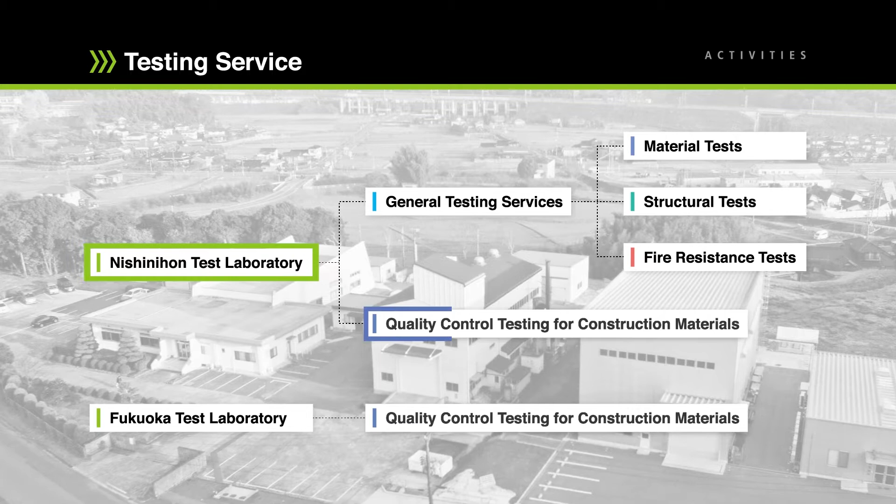The business outline at Nishinihon Test Laboratory covers the quality control tests for construction materials and civil engineering, the tests accompanying the performance evaluation, and the construction material tests related to concrete and steel used for building and civil engineering. The Fukuoka Test Laboratory covers only the construction material tests.

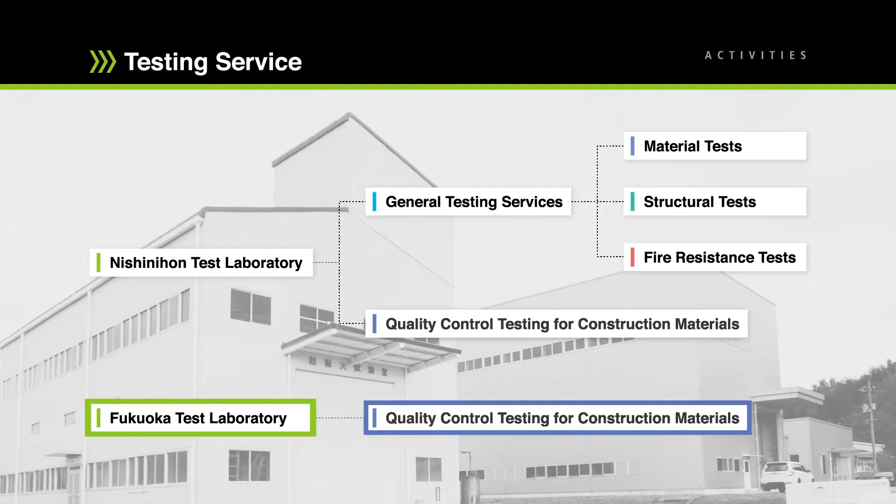Let us show you the characteristic advantages that satisfy our customers.

Let us introduce some of the characteristic advantages our Nishinihon Test Laboratory can offer to customers. Our history started in 1974 in Yamaguchi Prefecture as a testing hub in Western Japan.

We are a third-party testing organization representing Western Japan. We have a fire resistance testing facility, building structural testing facility, and durability test instrument that are the largest in Western Japan.

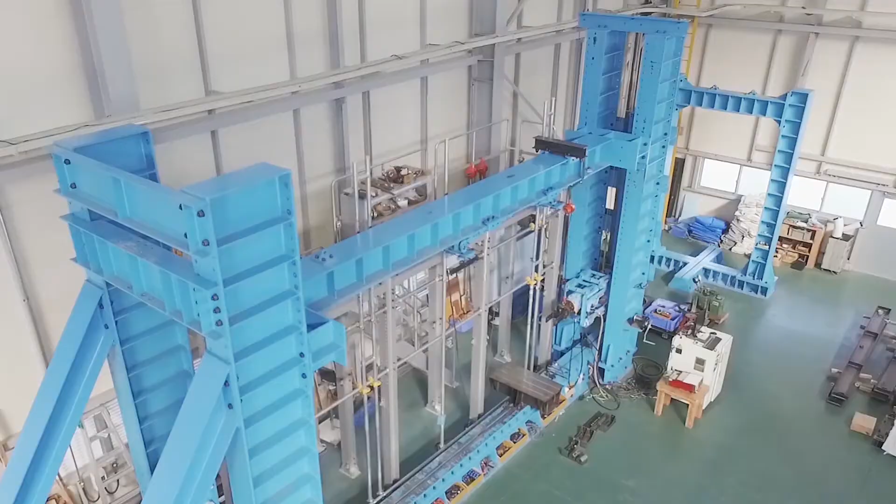The test site building over there was opened in 2013 in order to further fulfill structural and material tests. We have prepared the only capable testing facilities in this Western region. We can serve our customers with a full-range menu of satisfactory testing capabilities.

Now, we would like to introduce our testing items as the test laboratory of an accredited body. Here you find the testing items offered by our Nishinihon Test Laboratory.

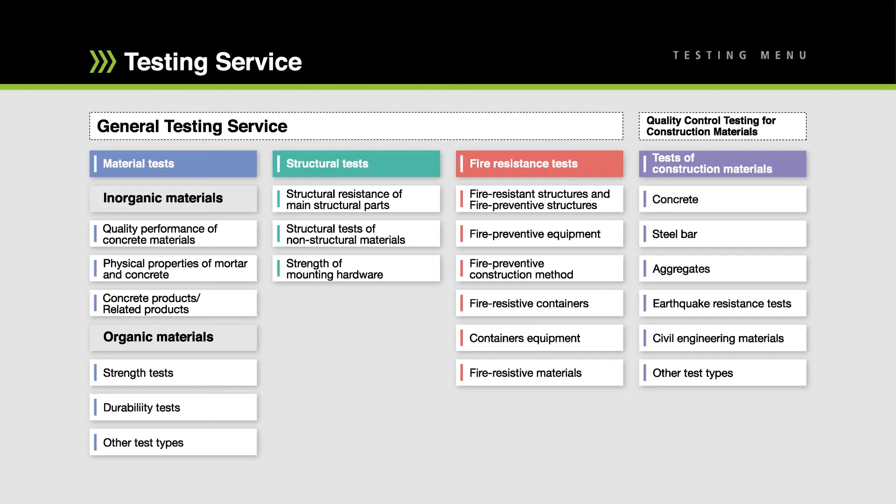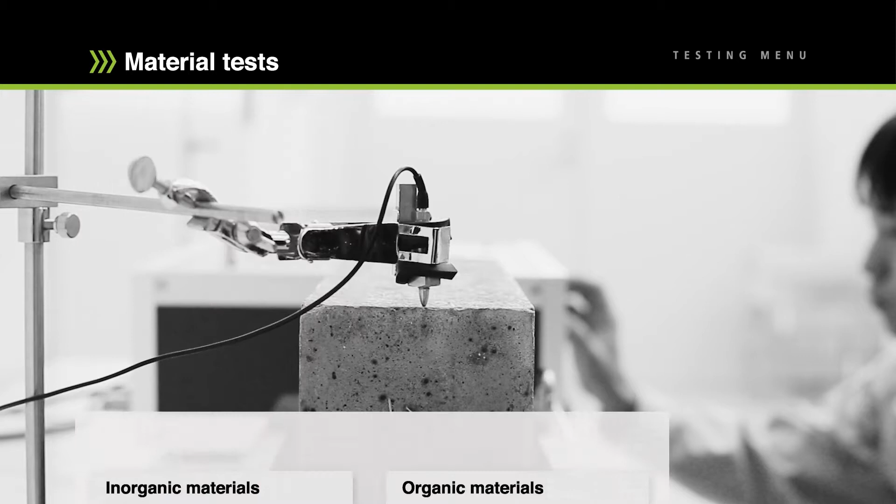In the area of material testing, we offer physical property tests, chemical analyses of civil engineering materials, and durability testing.

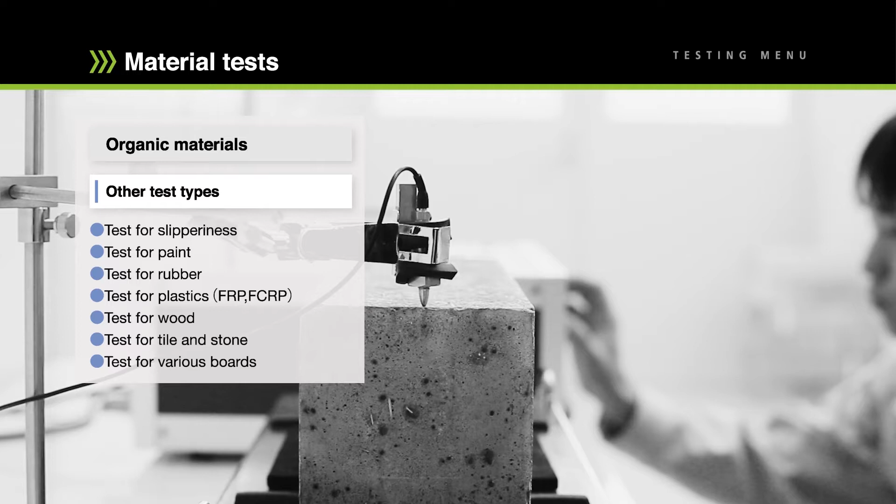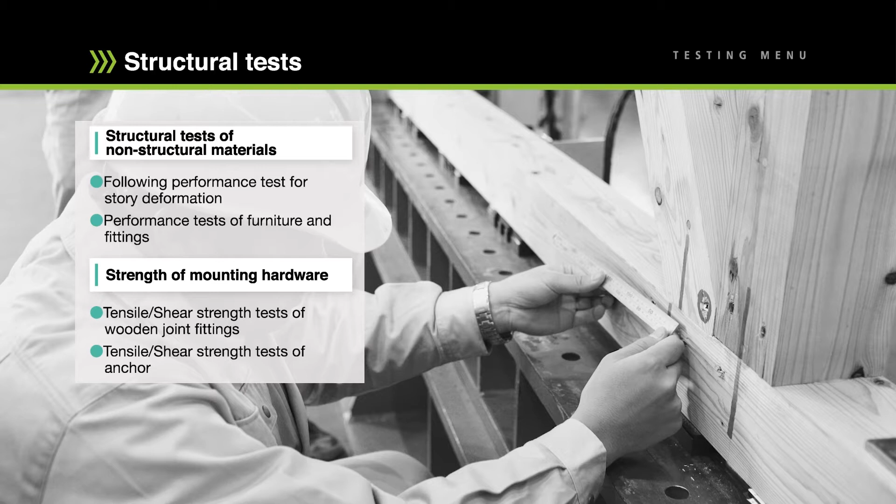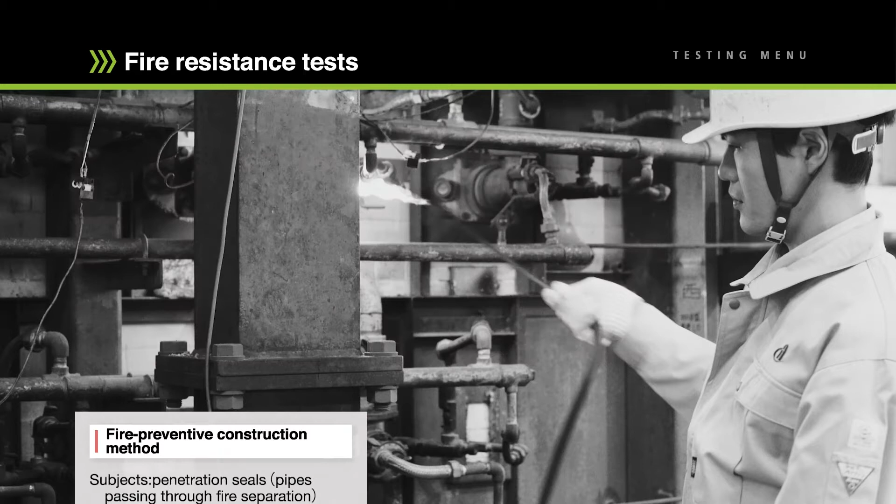Related to fire resistance testing, we can perform tests for beams, floors, and walls, as well as testing for fire preventive materials, equipped with the largest fire resistance testing facilities in Western Japan as the performance evaluation organization under the provisions of the Building Standards Law.

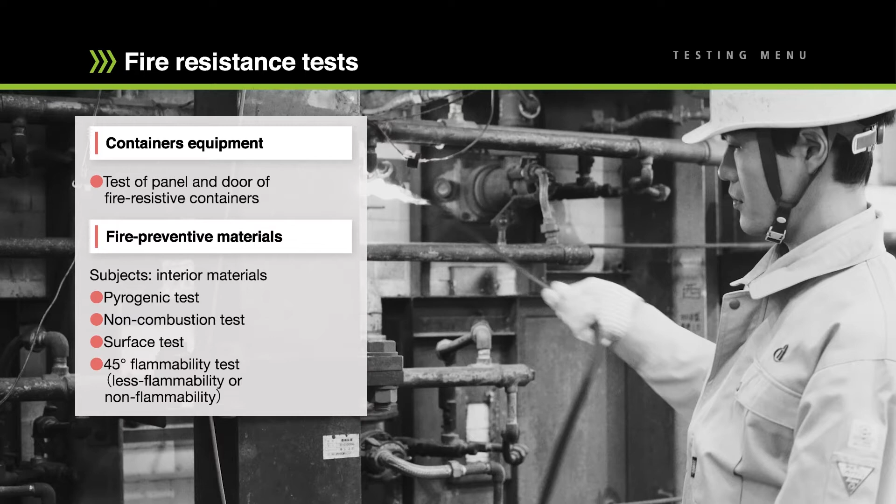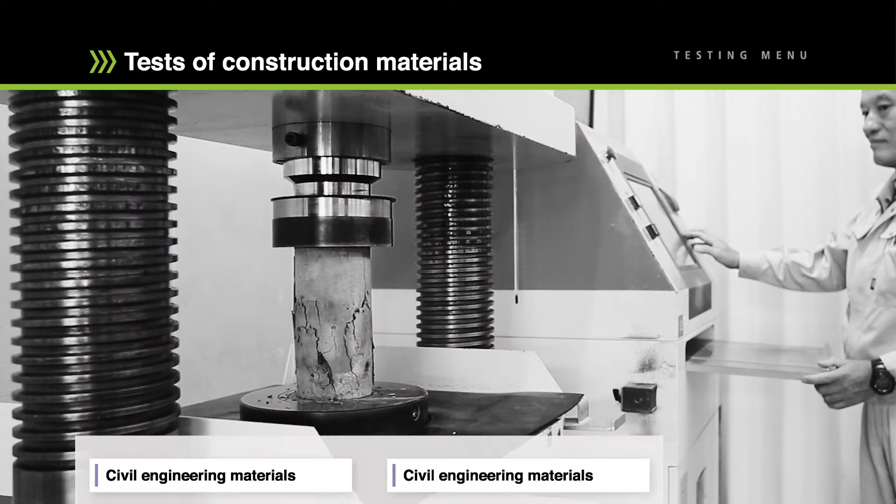Regarding quality control testing for construction materials, we offer testing of concrete and reinforcing bar, as well as quality control testing for building construction on site.

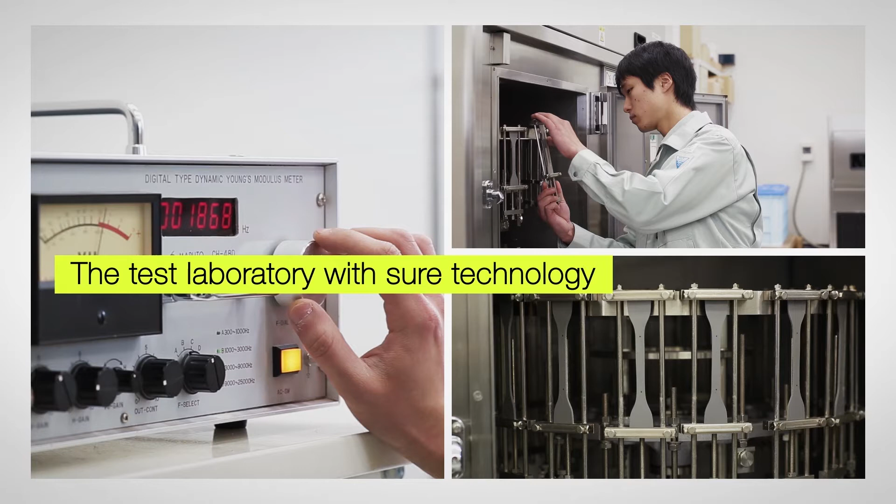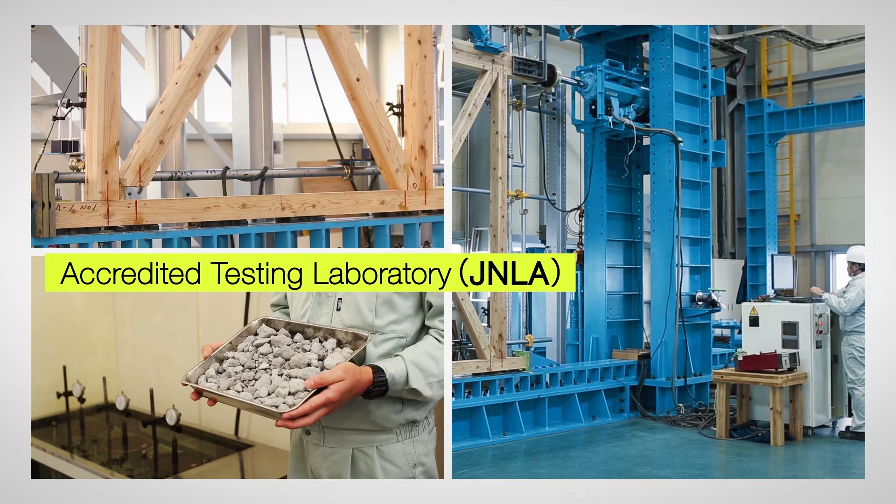Finally, in the area of construction materials testing, we have organized and are conducting the quality management system to comply with JIS Q17025 and ISO IEC 17025. Thus, we are registered as an accredited testing laboratory by JNLA, Japan National Laboratory, as well as MRA, Mutual Recognition Arrangements.

The last sales point is our human resource education and management. Our belief is that highly trained engineering capability is indispensable for our technical staff in order to coincide with the reliability and processing speed of testing performance.

We have long sought to improve the engineering capabilities of our staff by working with outside organizations such as universities. These are our 5 characteristic sales points for the Nishinihon Test Laboratory.

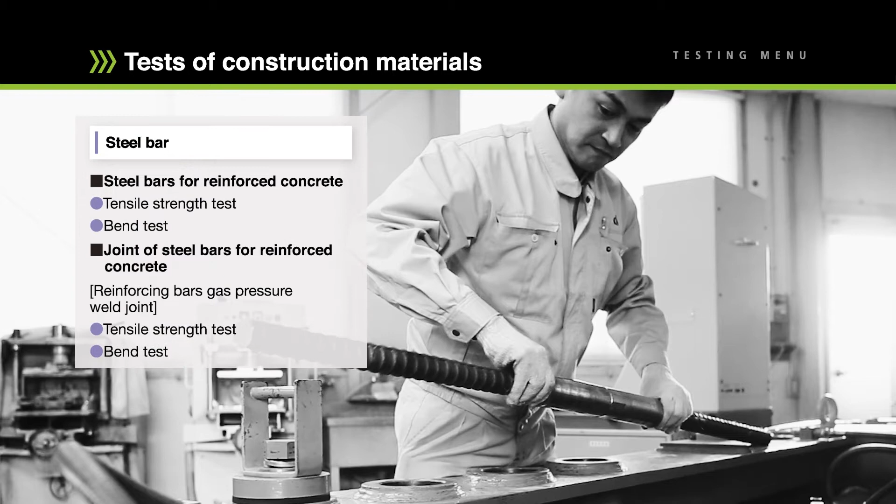Now, discussing briefly the characteristics of Fukuoka Test Laboratory. The testing menu we offer here is testing of concrete and steel, and construction materials tests for in situ quality control.

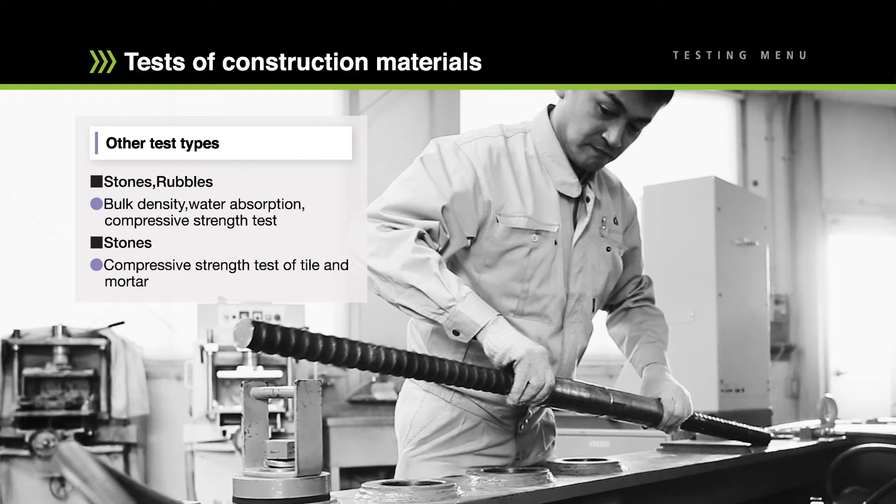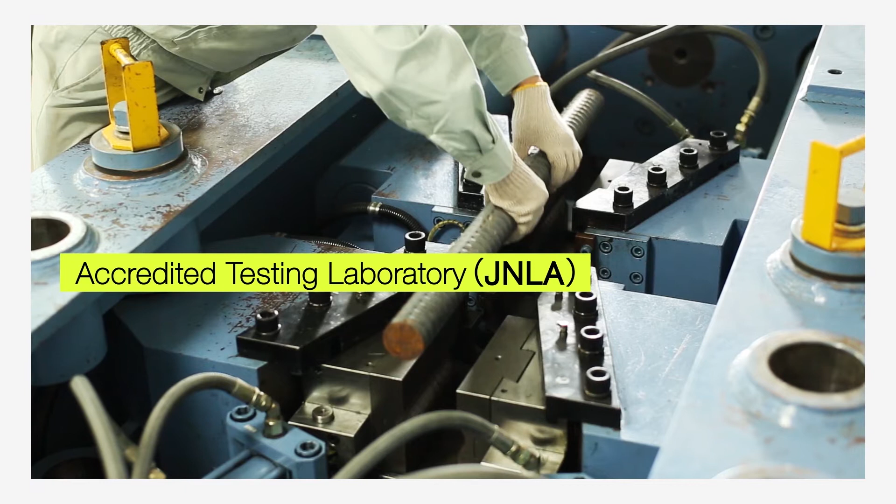Fukuoka Test Laboratory has been running the quality management system compliant with JIS Q17025 and ISO IEC 17025 and is proud of its credible engineering capabilities as a testing organization. The laboratory is also located for convenient access to Fukuoka International Airport, known as an entrance from East Asia.

Let us introduce the material tests. First, the ozone resistance test targeted at organic materials. The main test material subjects are those made from rubber and gaskets.

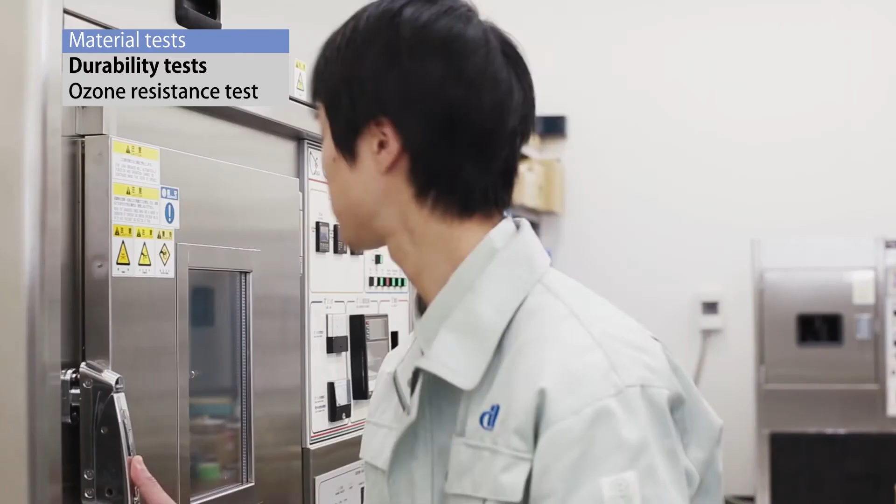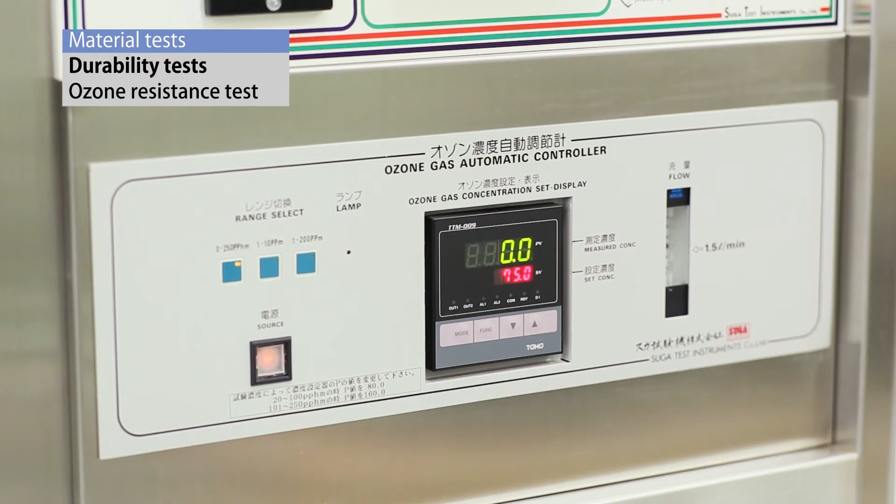The ozone contained in the atmosphere is very little, but we control the ozone gas concentration in the test instrument, and we monitor the appearance of cracks to confirm whether the material meets durability targets. Next, we show the freezing and thawing test targeted to the inorganic materials.

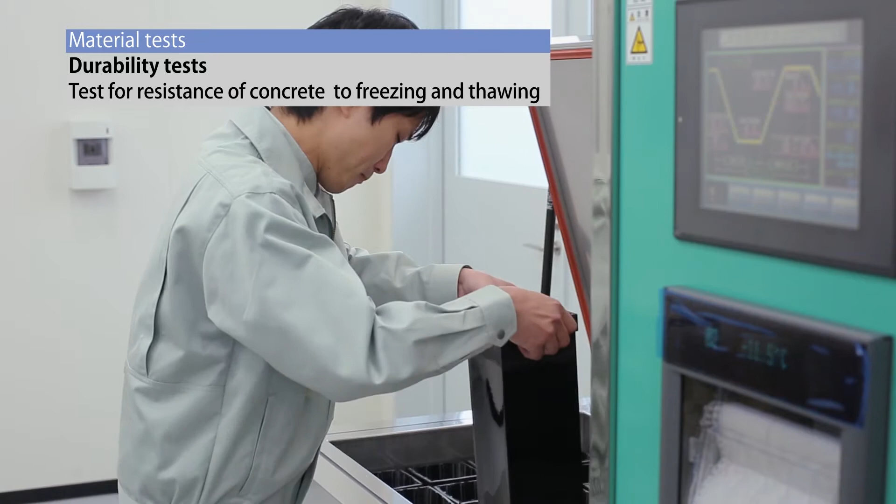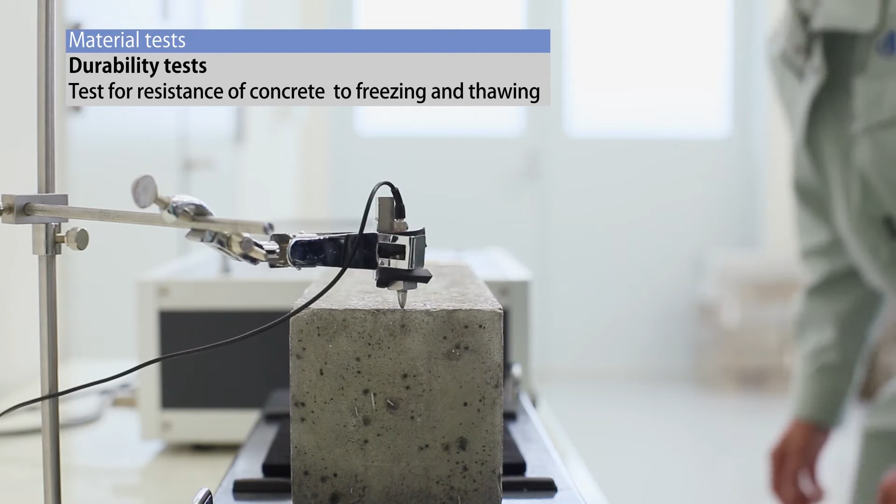This test mainly targets reinforced concrete. By repeatedly freezing and thawing the trapped water within the concrete, the expansion from freezing water and corresponding internal stresses creates cracks and separation on the concrete surface. This test observes the surface of the specimens and calculates the relative dynamic modulus of elasticity, thus providing evaluation of quality against frost damage.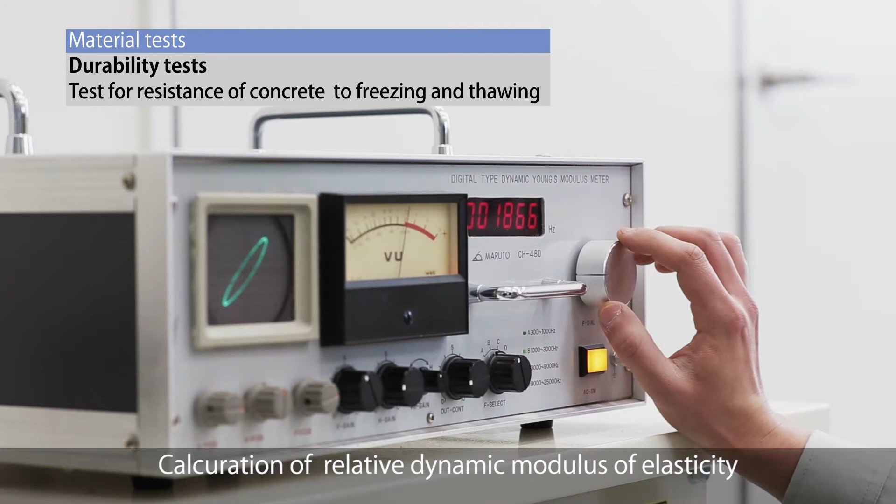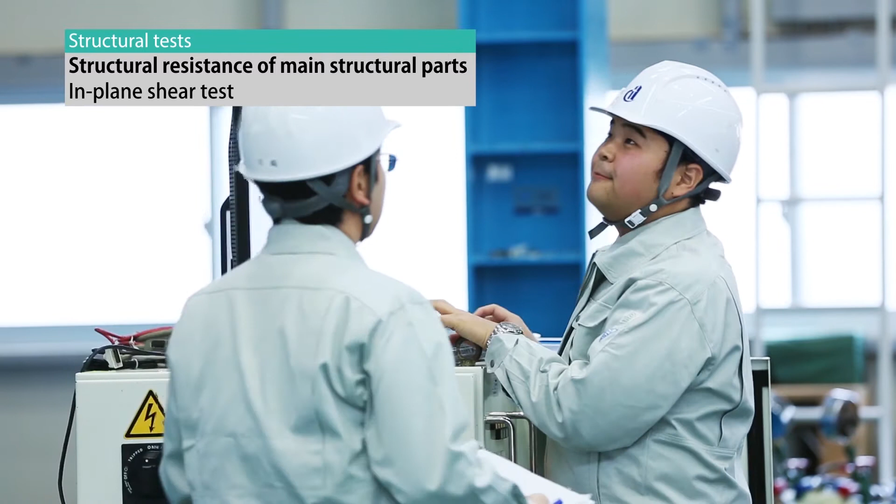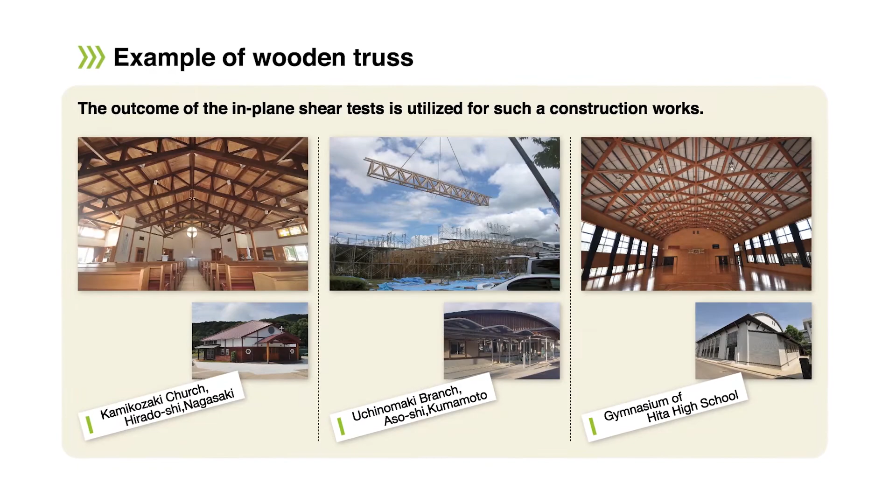This is the structural test. This shows the in-plane shear test of the wooden framework bearing wall. It aims to survey the degree of resistance of the bearing wall, the wooden framework structure, against the forces experienced during an earthquake or horizontal forces due to wind pressure.

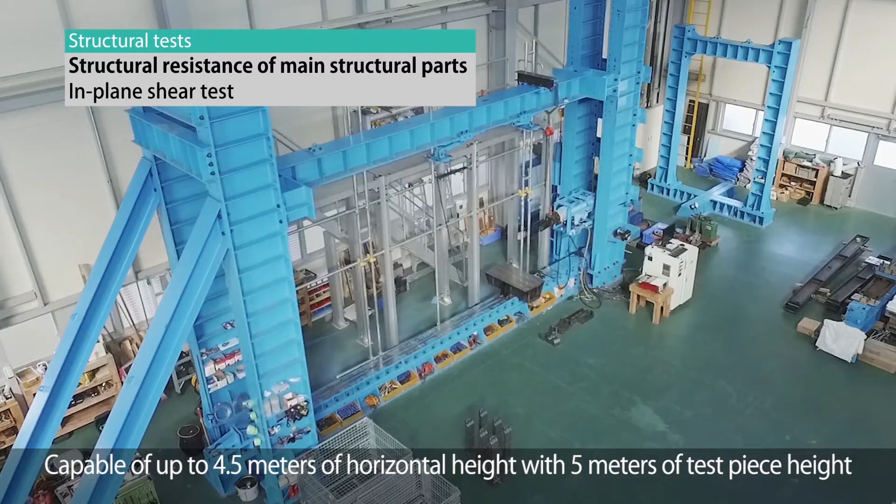During the test, we measured the displacements and load force of the parts and visually confirmed any damage to the sample. The large in-plane shear test equipment located in our Nishinihon test laboratory is particularly known for its capacity to test larger test structures than those of other test laboratories.

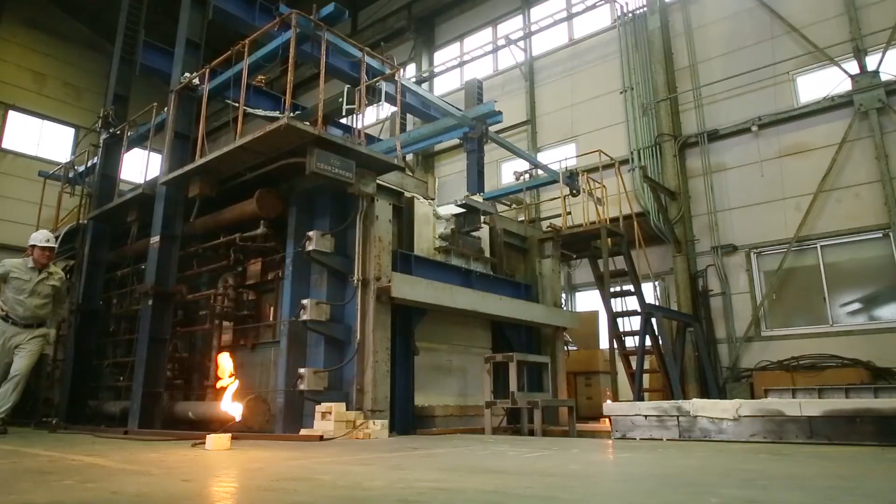This is the fire resistance test. The fire resistance test is utilized to confirm that a building structure will not collapse and to evaluate the performance of flame interception.

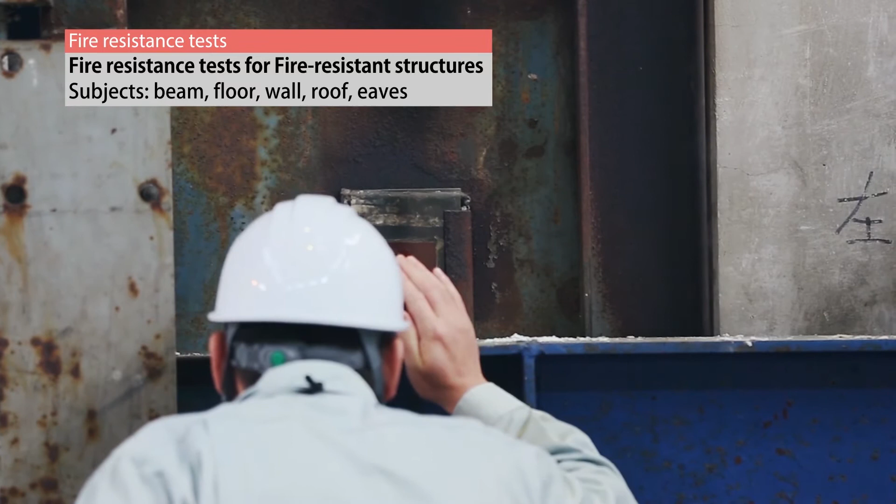The fire resistance test of a beam involves heating similar to levels anticipated during a fire, while adding load to parts of the building structure and measuring fire resistance performance parameters such as volumes and speed of deflection.

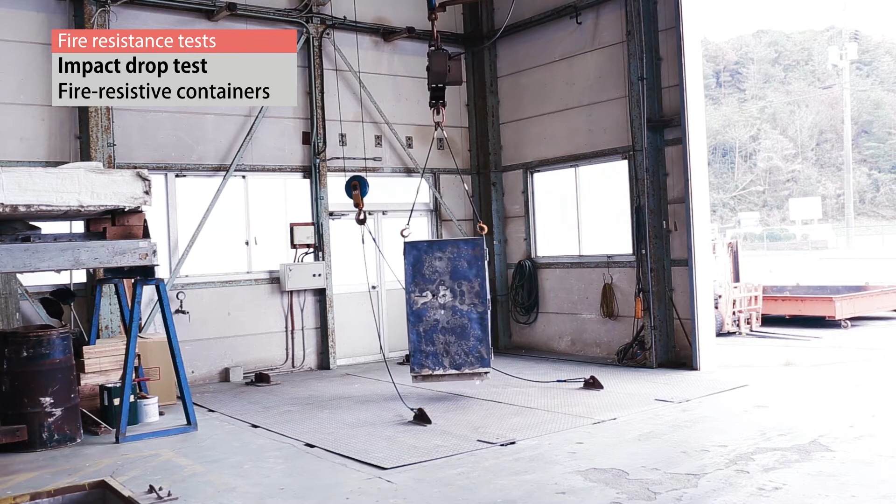Next, we introduce the drop impact test for fire-resistive containers. This test is to confirm the protection ability of the safe for the contained assets during a fire.

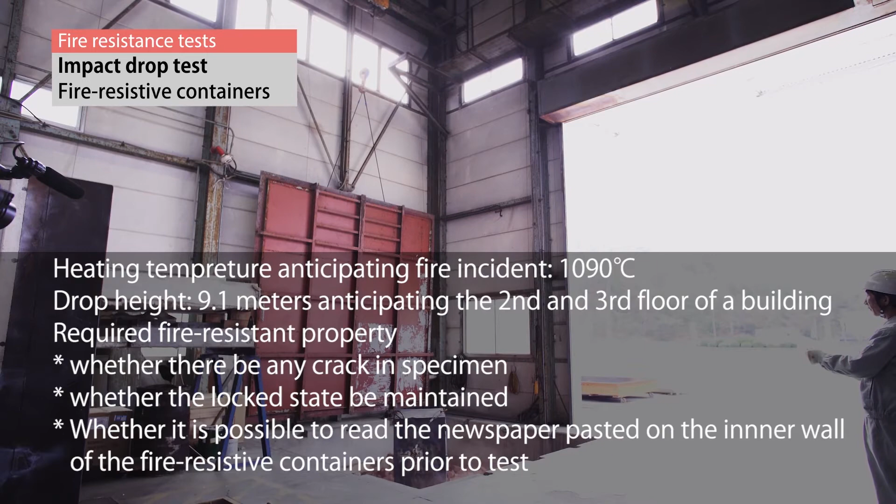Firstly, the fire-resistive container is heated to 1090 degrees Celsius, then dropped from a height of 9.1 meters to simulate falling within a building. Thereafter, additional heat is applied to monitor the fire resistance.

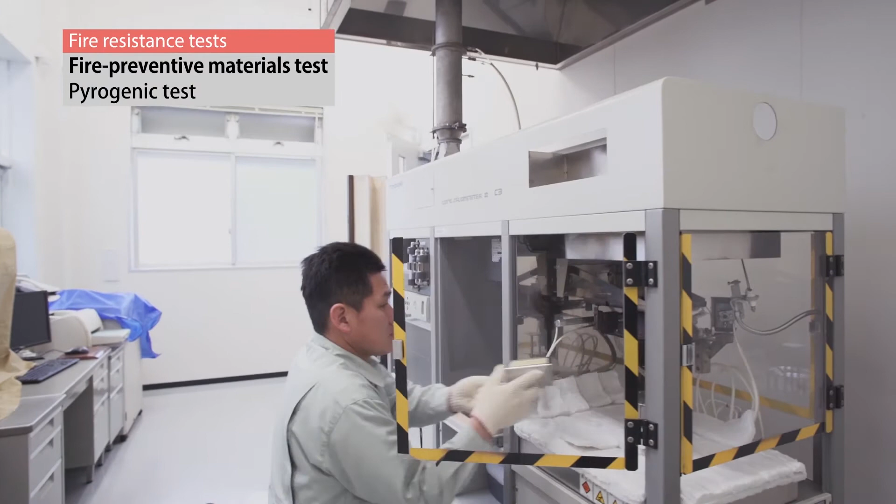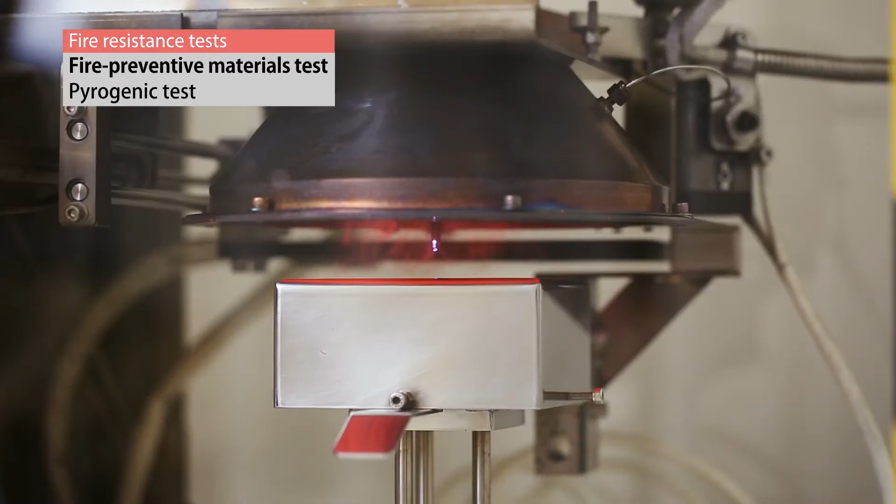Let us show you the testing of fire preventive materials. The fire preventive material test confirms the fire resistance ability of interior or exterior materials of building structures during a simulated fire. By exposing a specimen to radiant heat, the pyrogenic test confirms the fire prevention performance of the interior and exterior materials by measuring the pyrogenic speed and degrees of the test body via monitoring crack penetration within the specimen.

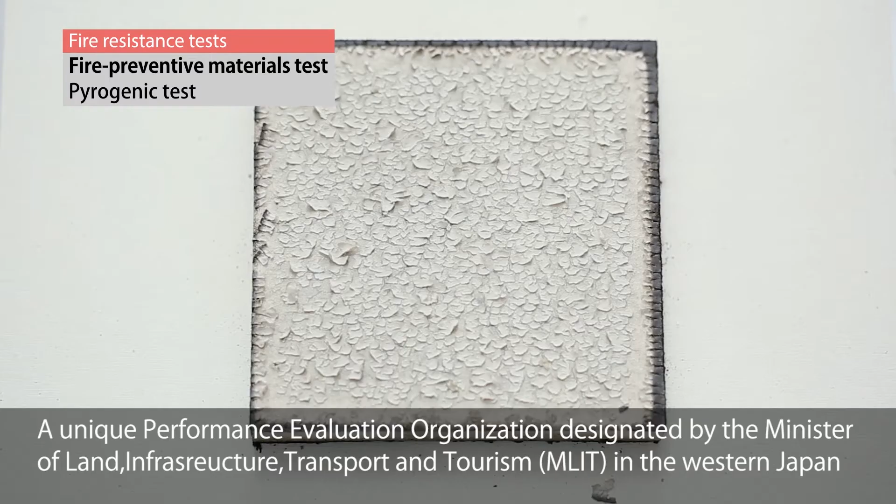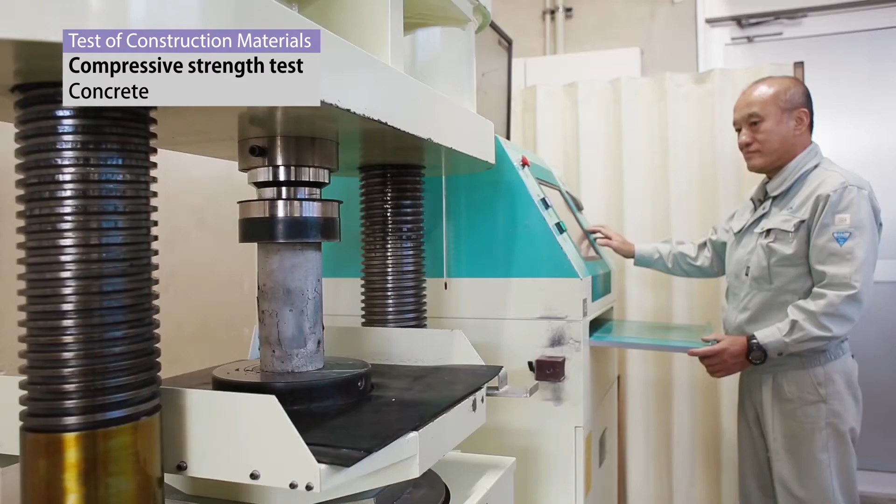Let us show you the quality control testing for construction materials. The concrete compressive strength test confirms whether the strength of the concrete placed into a structure conforms to the design rules.

To test, gently place the testing body within the testing machine, then add compressive load until demolition, whilst monitoring the strength parameters.

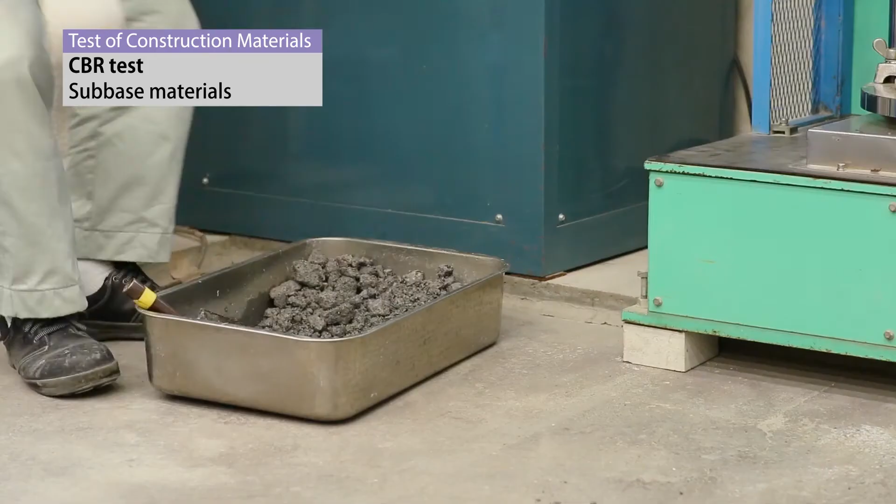Let us introduce the CBR test of sub-base, a category of construction materials. The CBR measures the loading capacity of sub-base by compacting crushed rock materials utilized to pave roads and airstrips, in order to increase safety, durability, and load-bearing capacity.

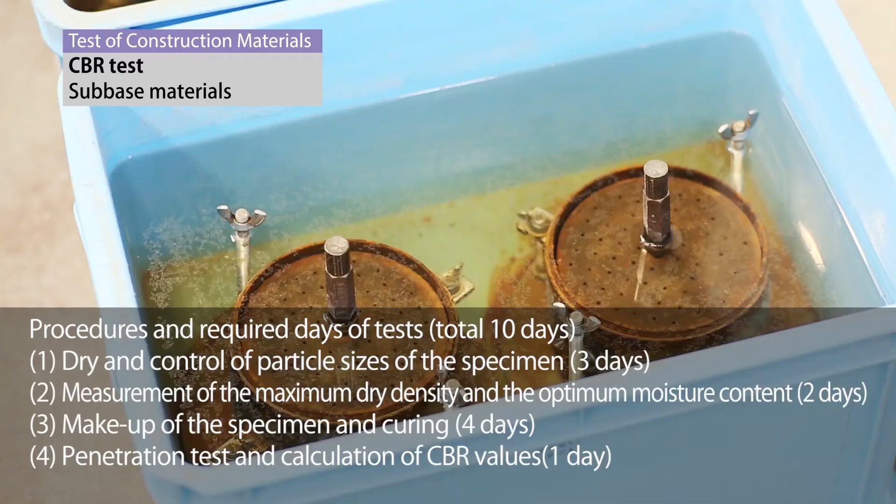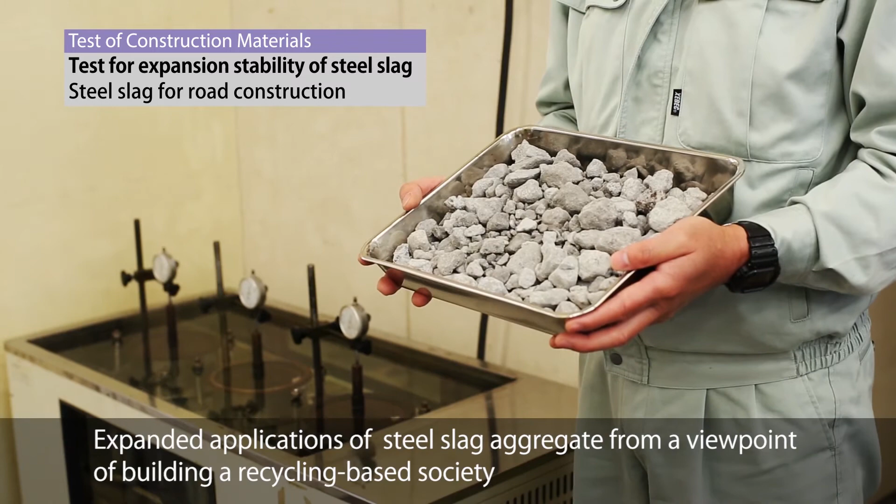Steel slags contain some residual free lime, which can react with water, causing expansion and damage to sub-base. This test measures the amount of expansion characteristics of the specimens by repeatedly heating and cooling the steel slag specimens in water for 10 days.

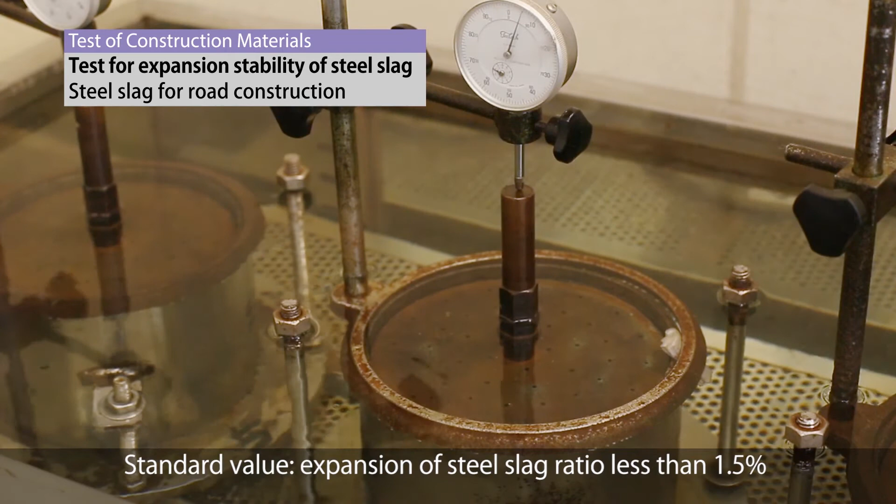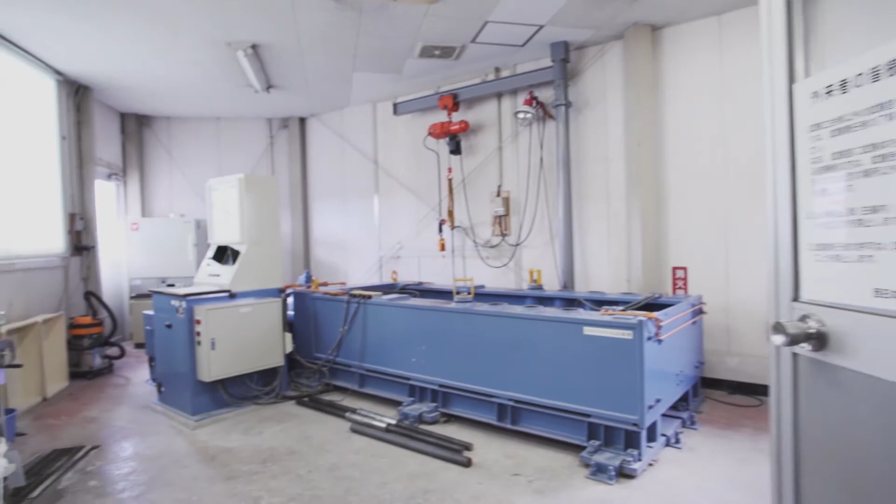Fukuoka Test Laboratory operates various test equipment for construction materials, including a steel bend testing machine, a tensile testing machine, two universal testing machines, and three compressive testing machines.

Here we demonstrate a compressive strength test of cement milk. Cement milk is a pile material used to support a building, which is a very important part of building foundations.

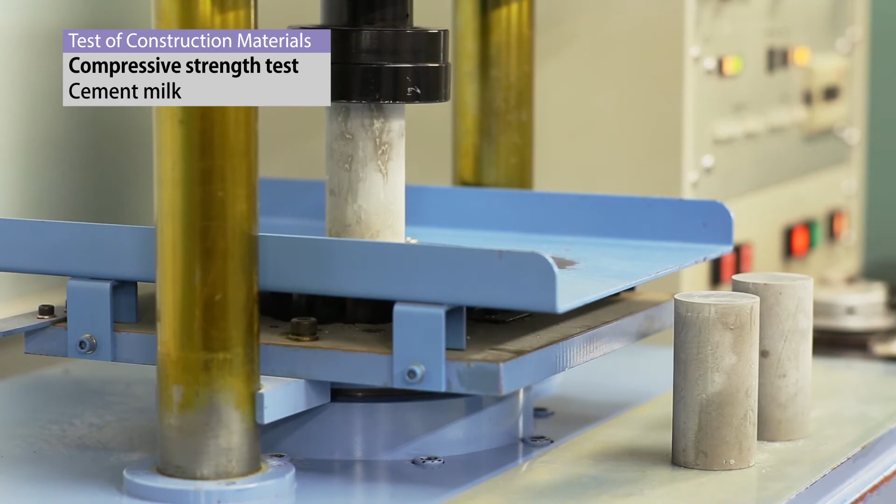The cement milk is sampled at the on-site construction to fabricate specimens. After the specified curing time duration, the specimens must clear the required compression strength regulation.

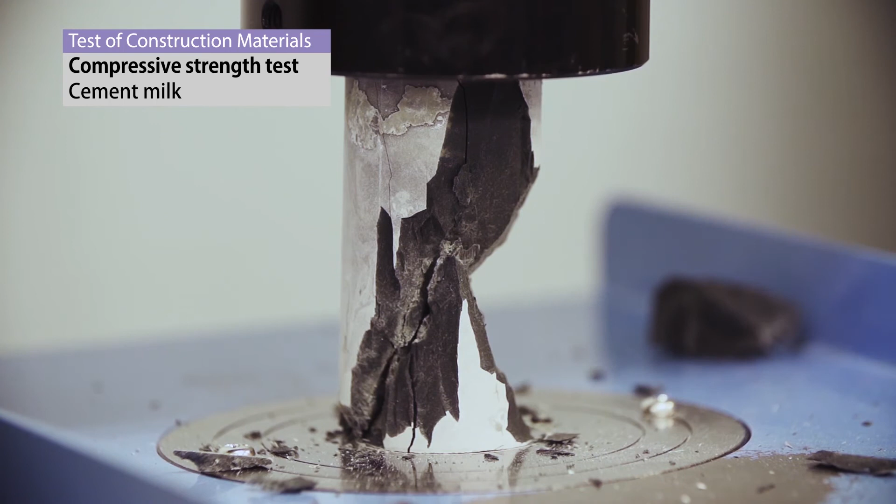We offer further compressive strength test services for residential housing foundation concrete. Customers use delivery services for sampled concrete via our sampling package, as per the instruction manual previously sent to the customer,

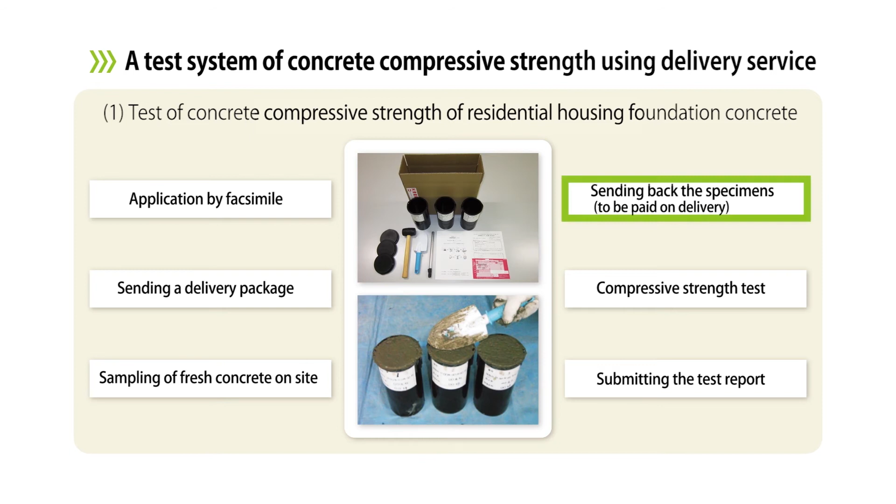or via the delivery services for sampled test specimens at a ready-mixed concrete plant, cured for testing of age.

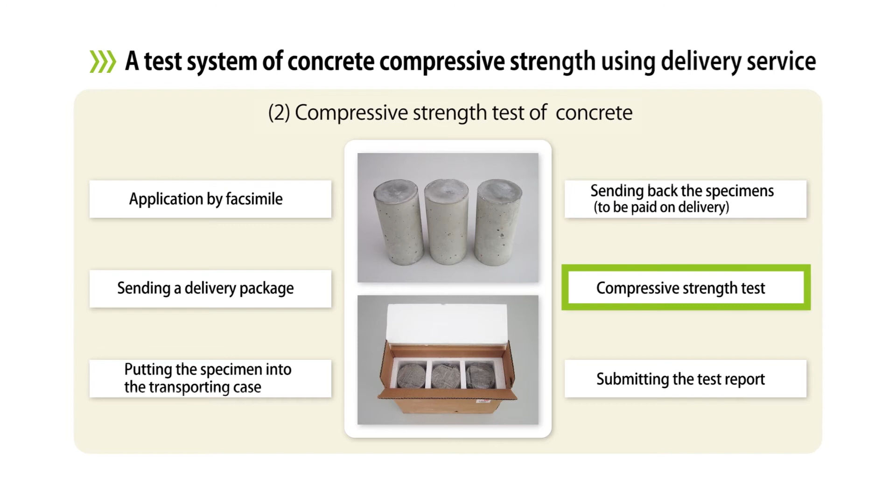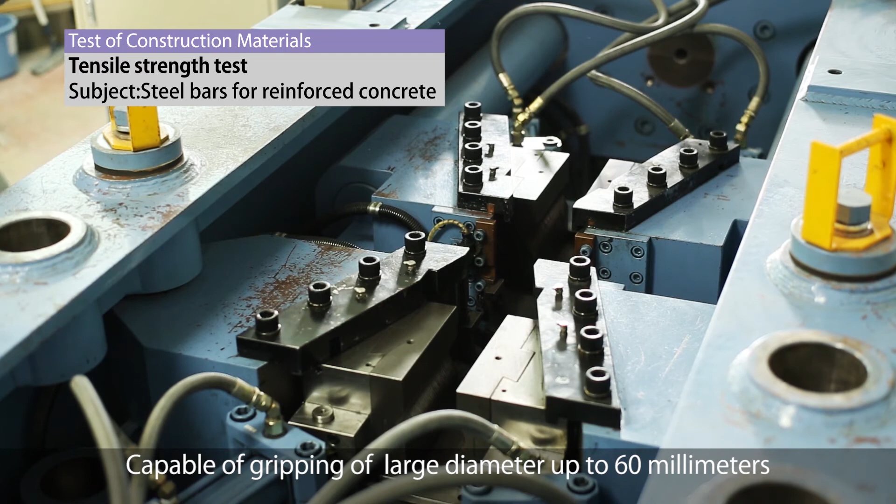Next, we demonstrate the steel tensile test. This testing machine performs tensile strength tests of materials and joints of larger diameters up to 60 millimeters, and reinforced bar of high-strength SD490, to confirm fracture positions and tensile strength of the test pieces.

Tests for mechanical joints of larger diameters are performed by welding the piece up to the necessary length to allow grip adjustment of the testing machine.

Our engineering advantages are certainly based on our experiences, nurtured by technical know-how over 40 years. Day-to-day testing is to ensure the quality of buildings. We are proud of supporting the safety of buildings, with our history of a number of tests done in a variety of fields of construction and construction materials.

Ask us what kind of performance you need to confirm, and we will provide the necessary tests for your requirements. Nishinihon Test Laboratory staff aim to be the leader of testing in Western Japan. We await your contact in order to offer speedy and accurate testing services, from initial inquiry to issue of the final test reports.